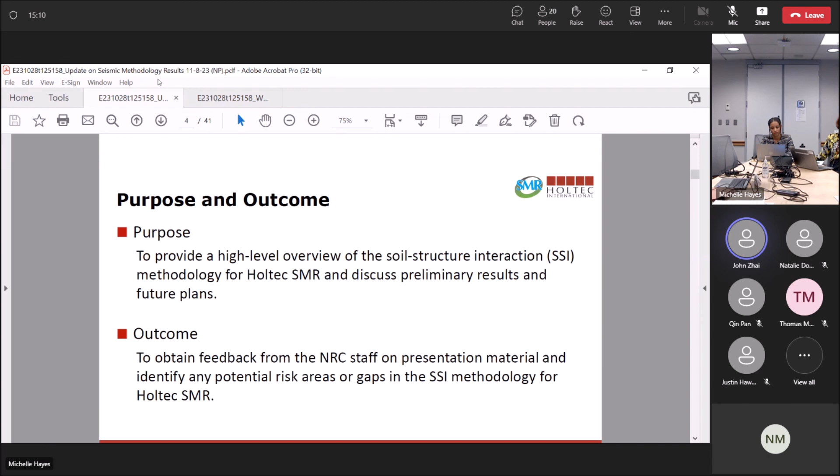By the way, we did receive comments from NRC staff this Monday, and we have done some review of the comments. We will provide our answers officially later on. Next, please.

So the methodology has been discussed with NRC, starting with the previous meeting about one year ago. We introduced a method which is not conventional - a nonlinear soil model involved in the SSI modeling and analysis, and this is also a time domain approach as opposed to the conventional frequency domain calculations. Following that meeting, we received NRC's feedback, and our understanding is NRC staff has a high-level understanding of our proposed method, and at that point we don't see any immediate concerns from the staff.

We also noted that NRC points out this is a first-of-a-kind review because of the nonlinear and time domain approach. NRC will have additional questions regarding this approach.

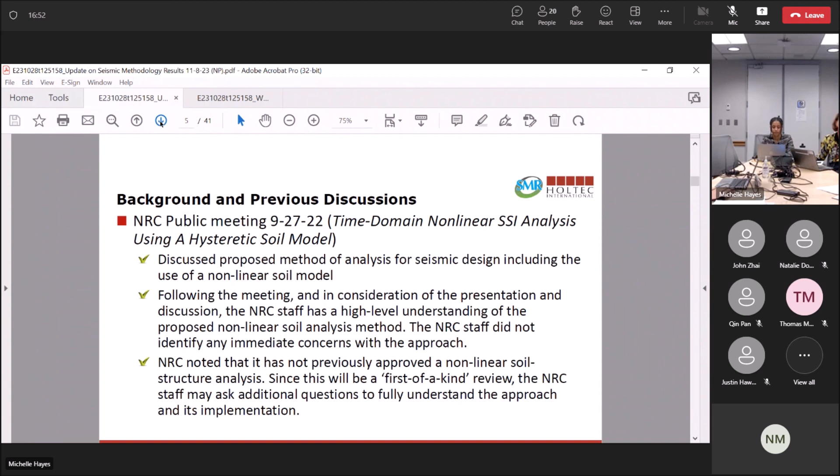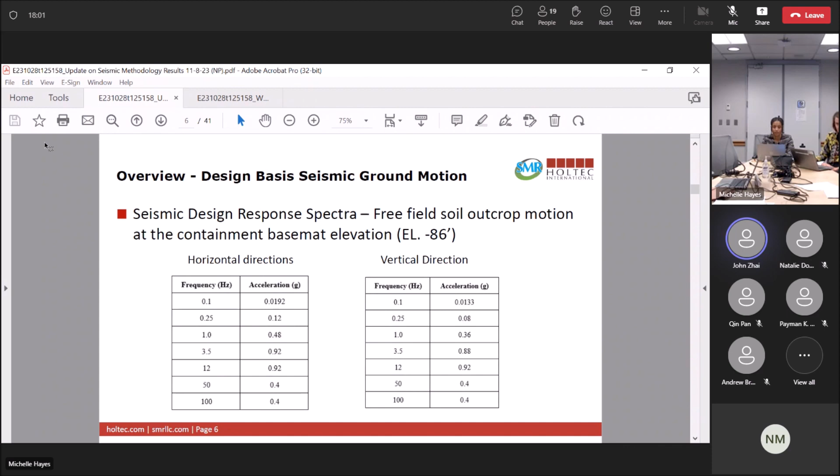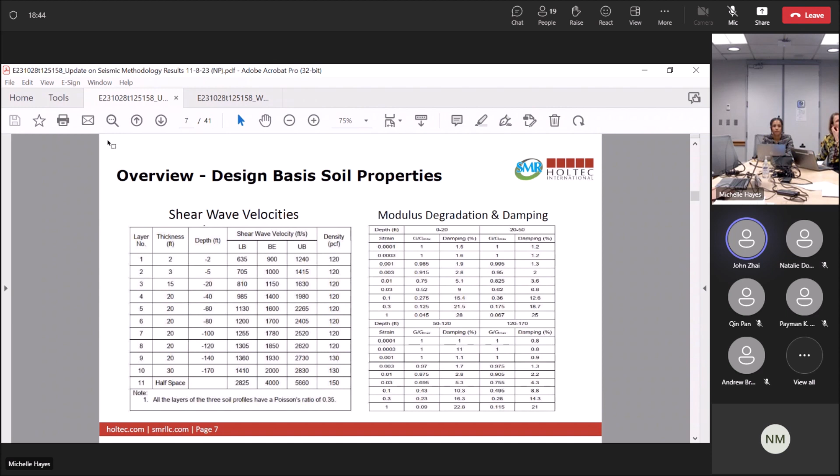This slide shows the soil profiles and some soil properties we chose. The soil profile follows the direction from SRP 3.7.1. We have best estimate, lower bound, and upper bound soil profiles to account for uncertainties in the soil properties. Overall it's a total of 170 feet of soil profile, and at different depths we expect the soil properties to change. So we use the 93 EPRI document to account for those variations with depth — basically the modulus degradation and damping ratio variations with soil depth.

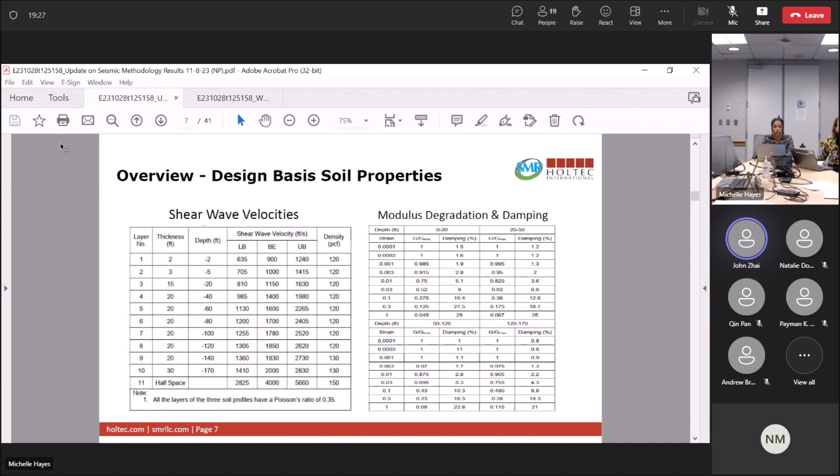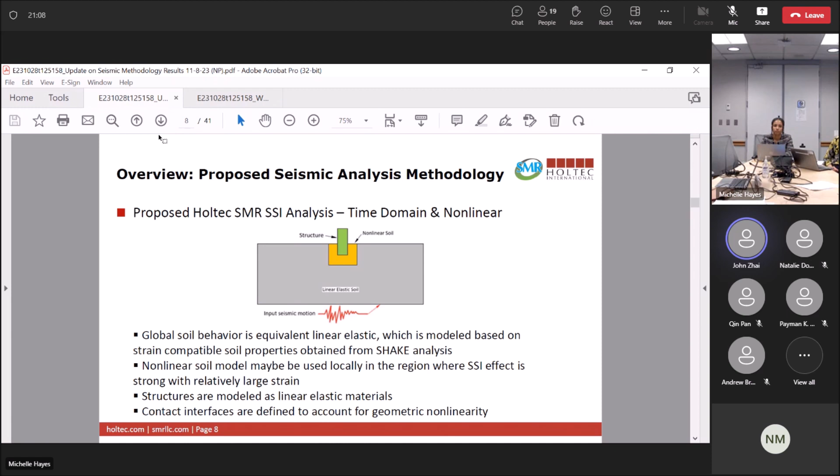So to instill confidence in this proposed method, we are going to do some validation work, which includes first the soil material models.

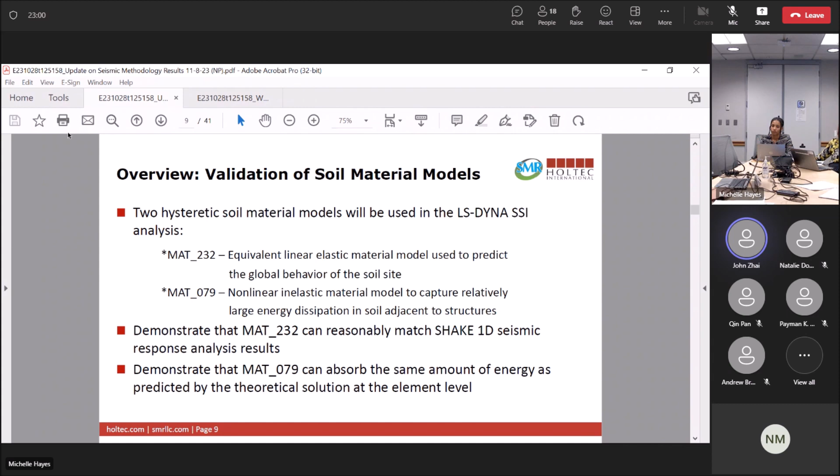Next slide, please. So the second validation focuses on the time domain analysis results. We want to use this validation to demonstrate that the results align with a conventional approach solution.

This is a demonstration that the SSI solutions are defendable using material 232 for soil. After that, we will introduce nonlinearity by defining contact between the embedded structure and the soil, so that the structure and soil can separate and move relative to each other. That will be demonstrated by running a higher seismic intensity to show that the difference between the DYNA solution and the SASSI solution becomes more significant as seismic intensity increases.

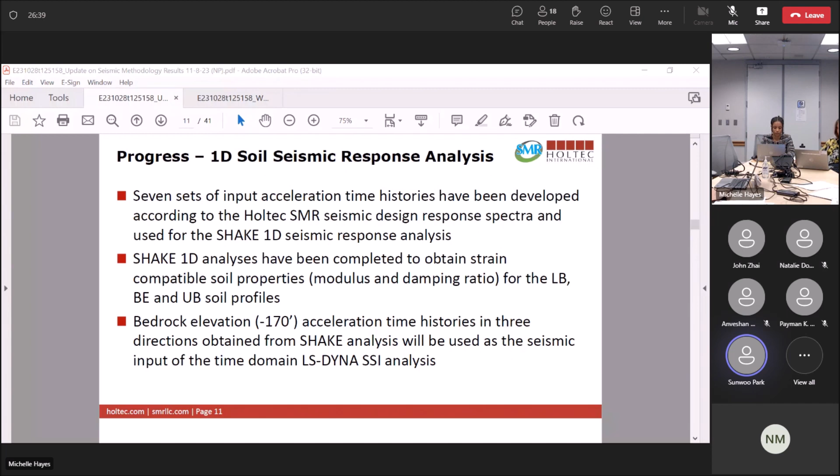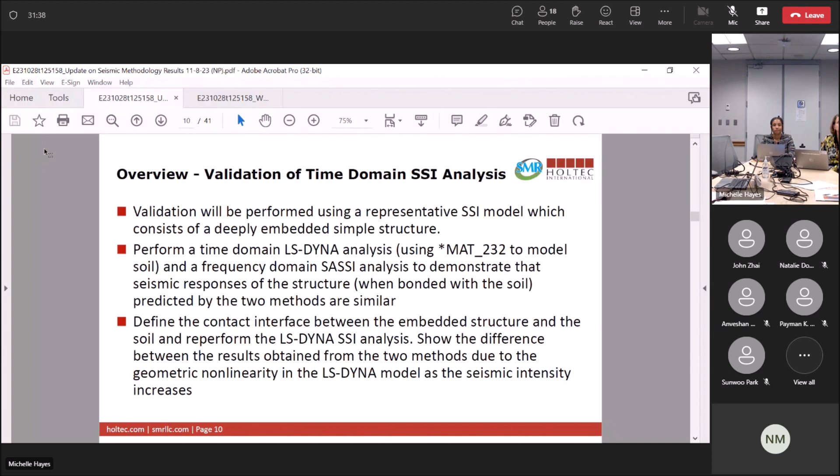All right, yeah, thank you. Okay, let's move to the next slide. I think on the previous one, we didn't finish that.

We generated seven sets of acceleration time histories based on the response spectrum, which is consistent with SRP 3.7.1 requirements for nonlinear analysis.

We also ran 1D seismic response analysis using Shake, so we get the strain compatible properties for the soil for all three soil profiles. We also obtain the input motion for SSI analysis, which is at the bottom of the soil column. Those are going to be used in the SSI model as input motion.

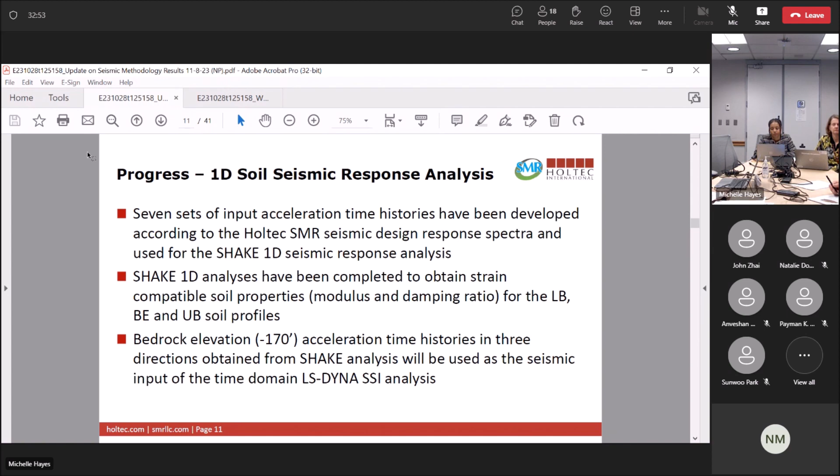Next slide. We have made some progress on modeling of the design. At the time we started this work, we only had a preliminary SMR-160 design. It's a single unit SMR. So the model we developed based on that preliminary design includes soil, seismic structures, and adjacent non-seismic structures.

Those are the containment enclosure structure, including the containment structure and the internal structure of the containment, the reactor auxiliary building, control building, radioactive waste building, turbine building, and annex building.

We use solid elements to model soil and thick civil structure components. We also use solid elements to model water in the annular reservoir and in the spent fuel pool. That water model is a simple water model and has no shear capacity. We use shell and thick shell elements to model structural walls and slabs, and thin shell elements to model equipment and some structures. Beam elements are used to model structural beams and columns, also steel structures and certain equipment. Finally, we use mass elements to account for the masses of equipment of significant weight.

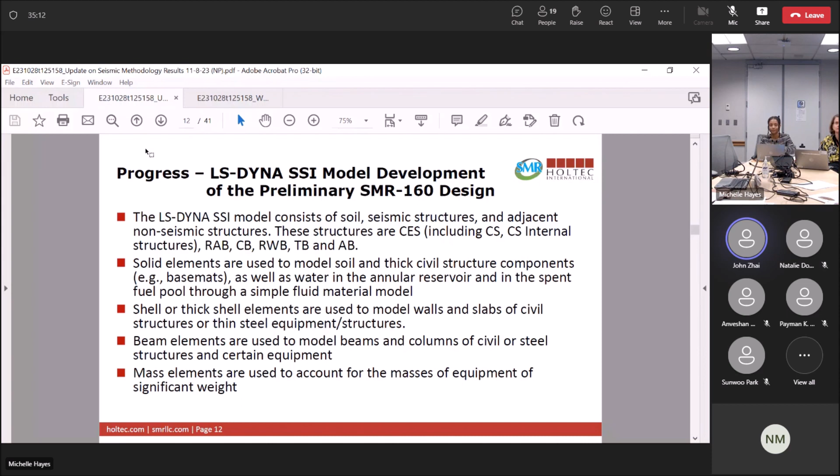Next slide, please. Before we move to the next slide, we have a question. Hi, John, this is Amit Ghosh from the Structural Engineering branch. Can you elaborate on your second bullet, the solid elements used to model the soil and civil structural components as well as fluid water? What kind of elements have you used, and how do you model the water part? Can you elaborate a little bit more?

Okay, the solid elements for soil, we use 8-node solid elements, and the material model, as I mentioned, we plan to use material 232 and material 79, but they all take the solid element shape. For the civil structures, the majority of those thick structures will also use solid elements, and for the walls there will be shell elements. For the water considered in that SSI model, we use a simple fluid material model available in Dyna, but we don't intend to model the sloshing effects. We consider that a secondary effect for the SSI analysis, so that's the plan for utilizing solid elements in the model.

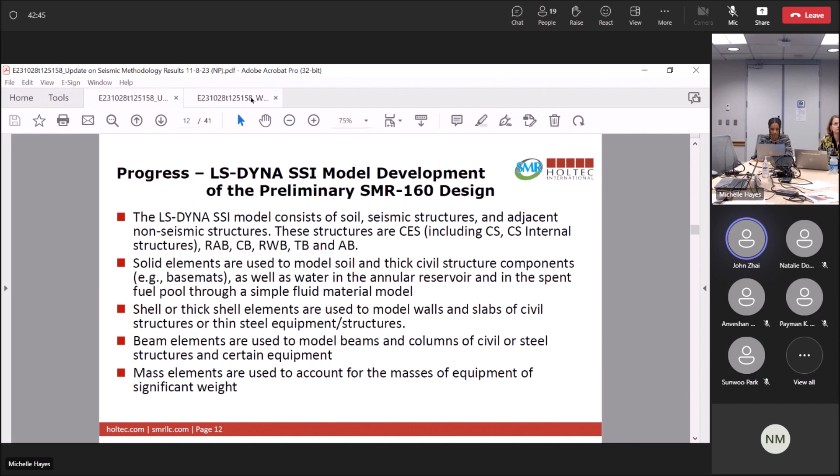Next slide please. This picture shows the overall model for the SSI analysis. So we have a big soil area region to model, and all the structures considered are in the center area of this model. And this soil goes all the way to the bedrock elevation, assumed at minus 170 feet.

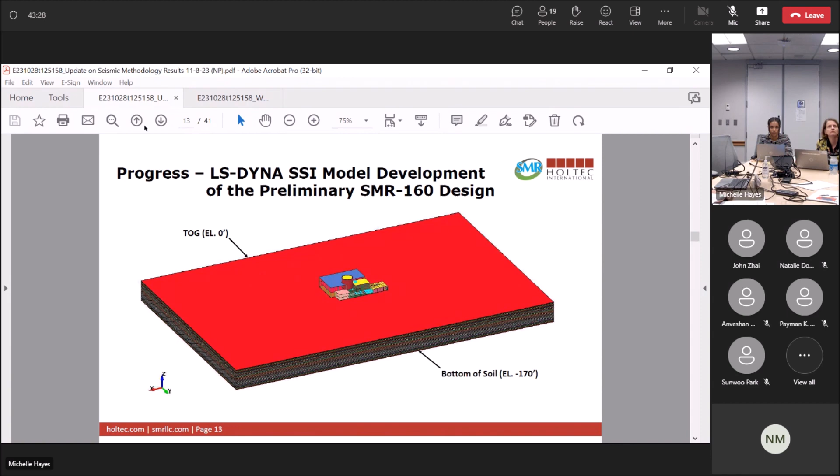Next slide, please. Next slide, I think it jumped too much, but okay. Hold on a second, having some trouble. We're on slide.

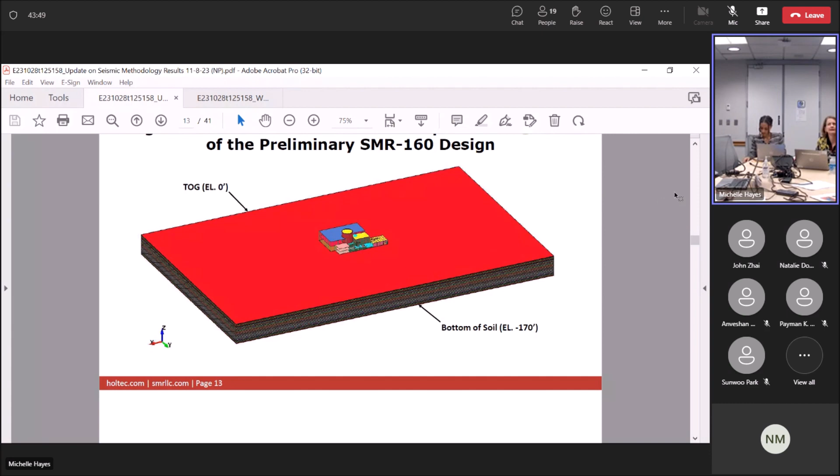This is a close-up view of that SSI model. We have turbine building, CES, annex building, RWB, and the reactor auxiliary building.

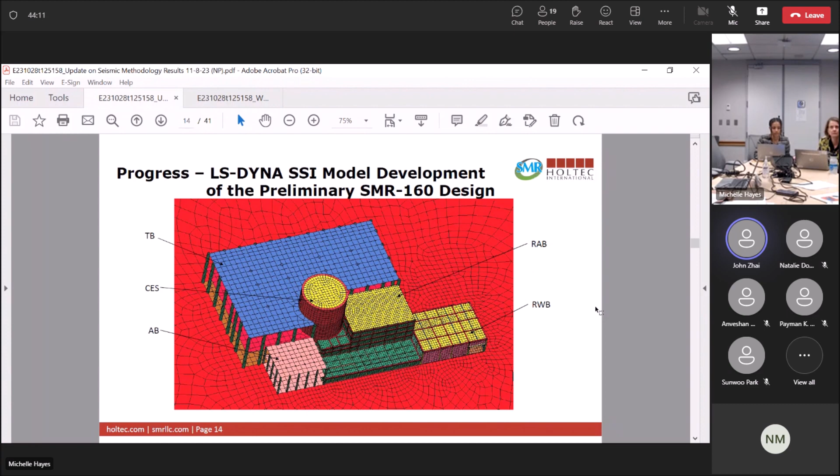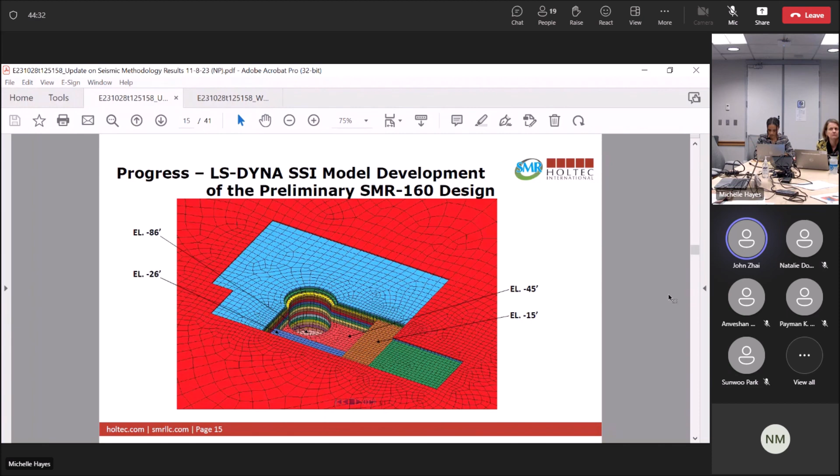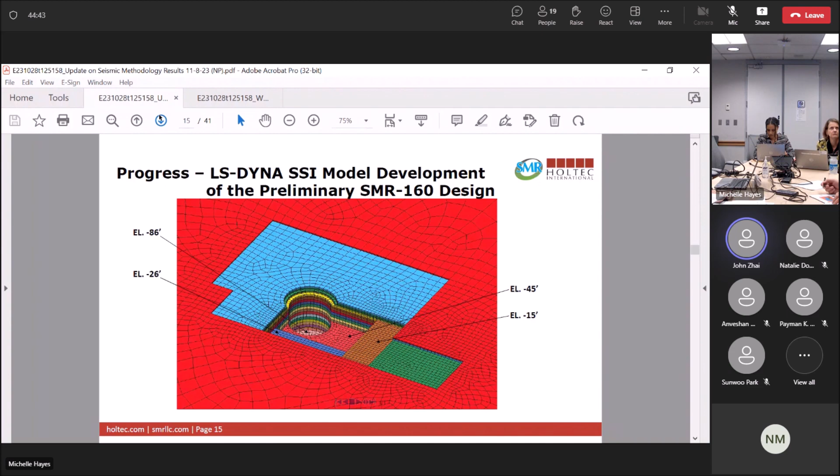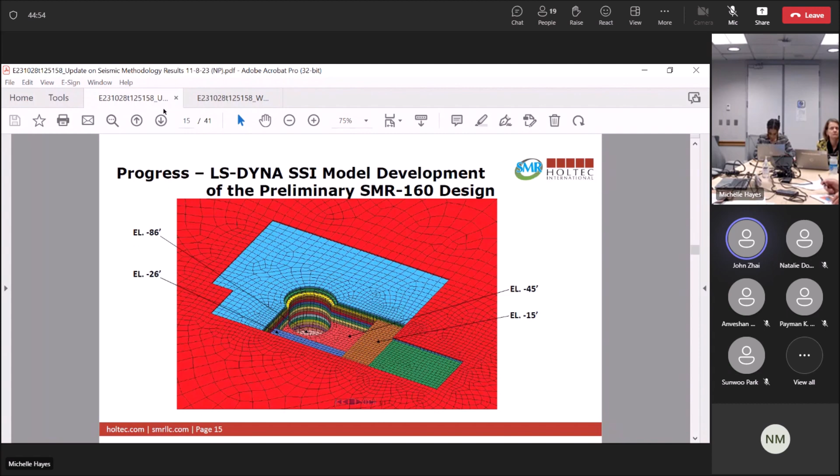Next slide, please. This shows various elevations where the soil surface interacts with the embedded structures. For example, -26, which is the base of the control building. -45 is at the bottom of the RAB, and there's another step in the RAB embedded structure at -15, and the CES goes all the way down to -86.

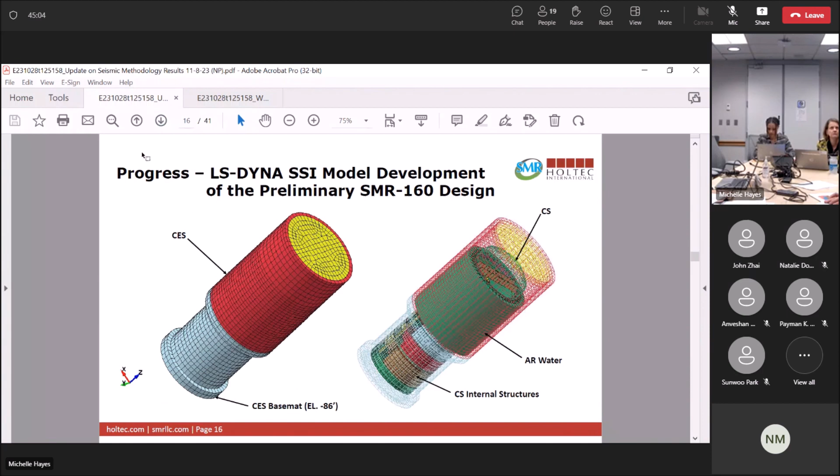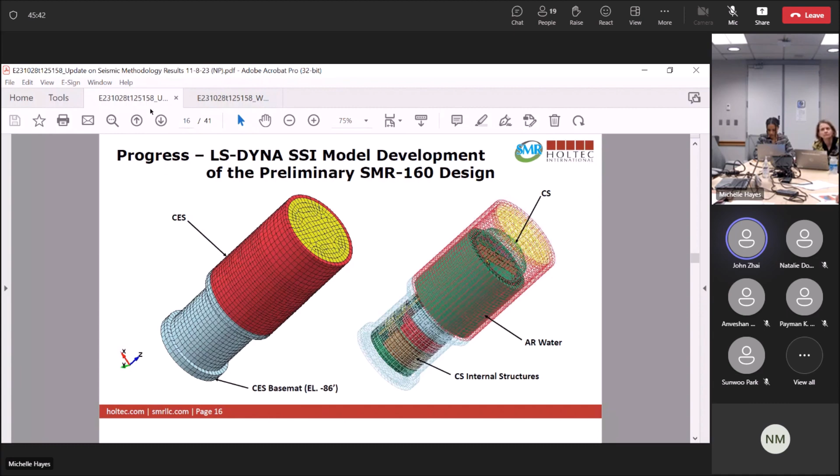Next slide, please. This picture shows the CES overall model. This gray area is embedded in soil, and you can also see the annular reservoir between the green and that kind of reddish mesh. That's a very narrow configuration, so no significant sloshing is expected, as I mentioned. And here you can see some of the internal CS structures.

Next slide, please. Okay, those are the clearer views of the CS and its internal structures. We have, for example, beams modeling the steam generator and RPV, represented by beams. The internal structure inside of that containment structure looks like this. Here is the spent fuel pool water in the pink area, and we have shell elements here to model the slabs. Next slide, please.

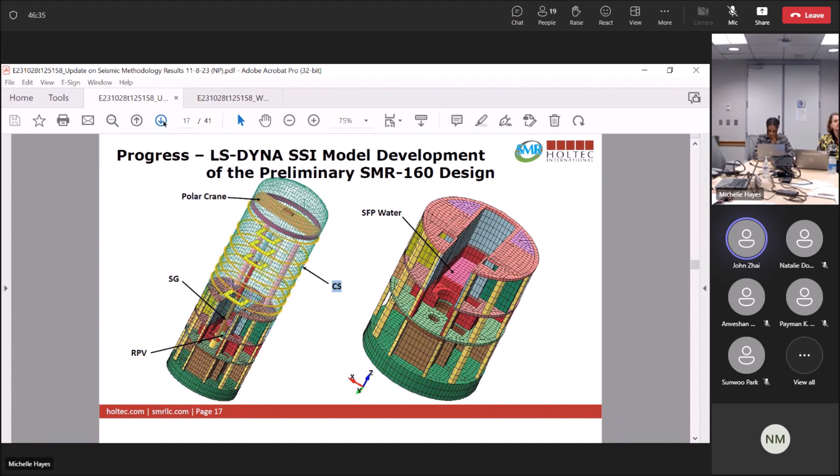This is one view of that reactor auxiliary building. Here, this typo should say CES, and this partially surrounds the CES structure and all those beam elements. You can see those beam elements, and other walls or slabs are all modeled by shell elements.

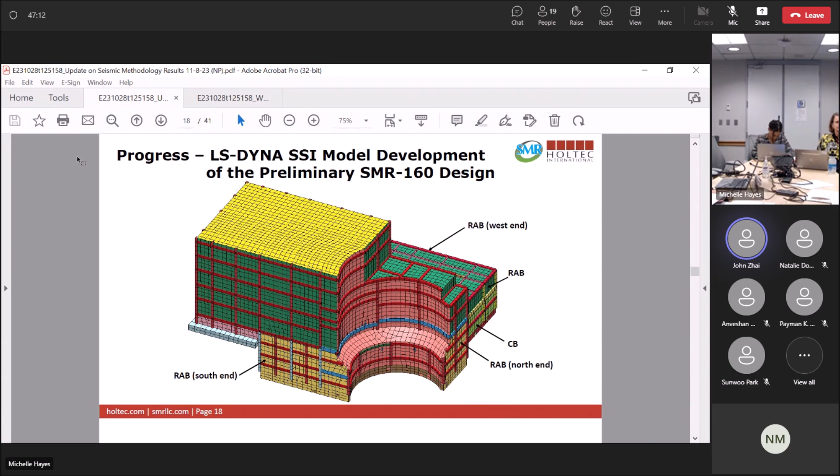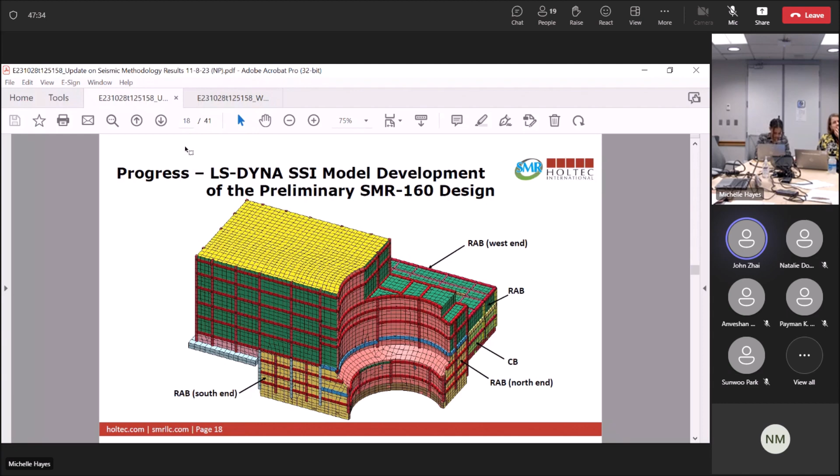Next slide, please. Are these buildings connected to each other right now, or is there a gap, like a seismic gap between the buildings? This basically shows the RAB and the CB, so they are connected by design. But the other large buildings are separated. As you noted, seismic gaps, isolation gaps, are provided between other large structures.

This picture shows another orientation looking at the RAB and the control building. So we have solid elements modeling that base mat at different elevations.

Next slide, please. I have a quick question here. Not knowing your configuration very well, all I see is this picture, and I see basement over basement. Is that just the way the picture is depicted, or is that true? Like the yellow basement at elevation minus 45 feet.

Over that, there is a CB base mat at elevation minus 26 feet, and over that, there is a RAB base mat at minus 15. Oh, this is just the way this view is.

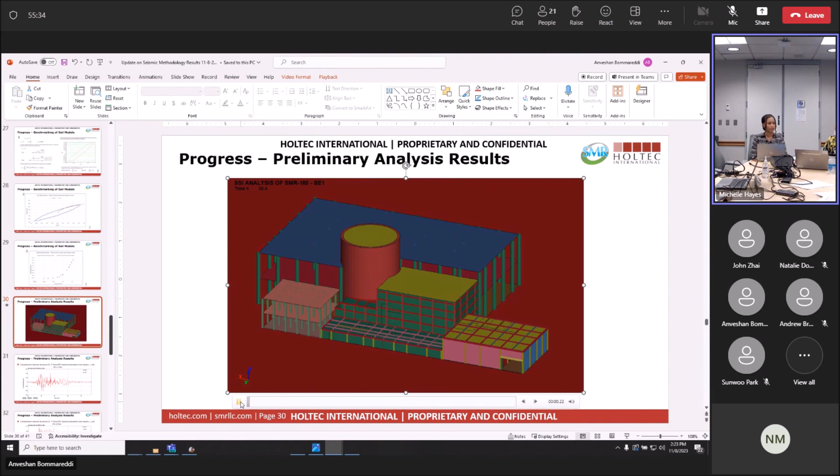Yeah, I guess I'll just comment, you have this marked as proprietary and confidential, but this is a public portion, and I believe that this was on our public slides.

So if you play that, you can notice the oscillation of those buildings. You see it? It's pretty subtle. We want it to be subtle, we don't want it to be drastic. Maybe you want to exaggerate the noise. We'll start again and look closer this time.

Yeah, you can see it if you just look at one little thing, in this direction, like this is correct.

Okay, so thank you, Anveshan.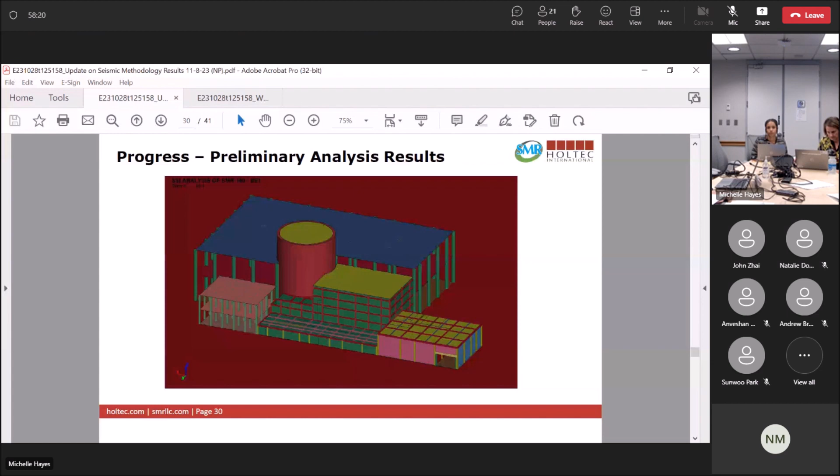So I just plot 2 locations showing what the acceleration looks like. This is an acceleration time history at the ground elevation inside the containment internal structure, at the RPV stand location, which I picked arbitrarily. This is X direction. The next slide will be the same location but in the perpendicular Y direction, just to make sure X and Y are horizontal directions.

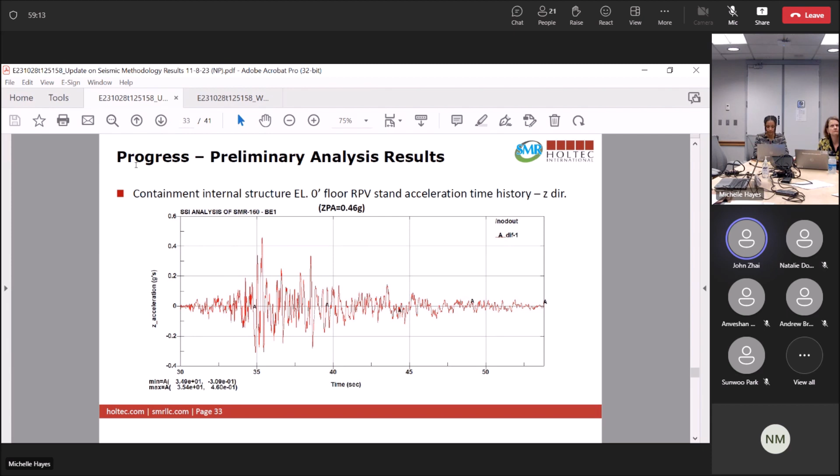So the next one will be the vertical direction time history. Next slide. You can see the ZPA increased a little bit, to like 0.46 Gs. Next slide, please.

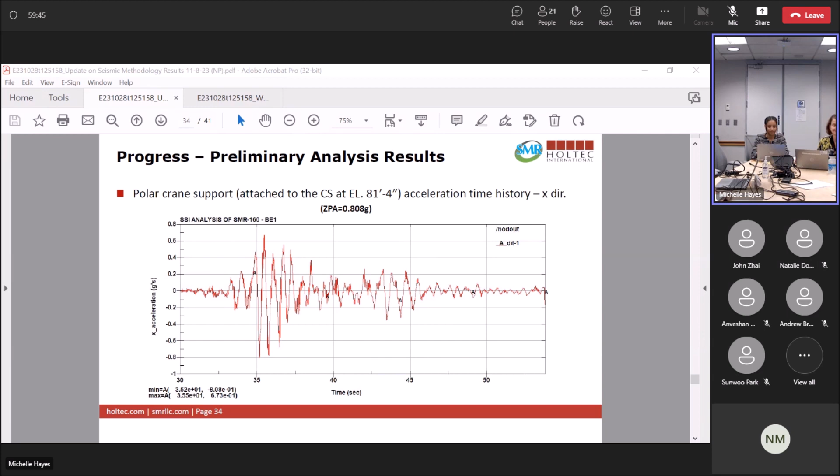Thank you. This result is taken at the polar crane supported elevation. You see the ZPA increased to 0.8 Gs roughly. That's the X direction, horizontal direction. Next slide, please.

The Y direction is about the same ZPA. Next one, please. That's the vertical acceleration time history. So they are all consistently increased, as this is located at a pretty high elevation.

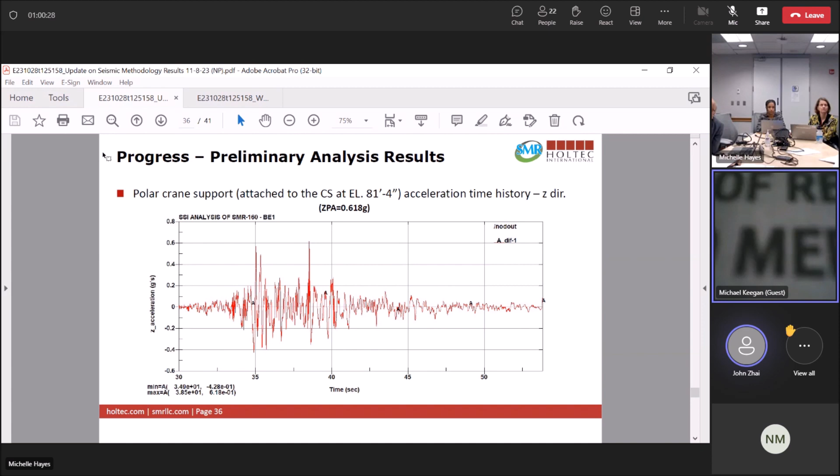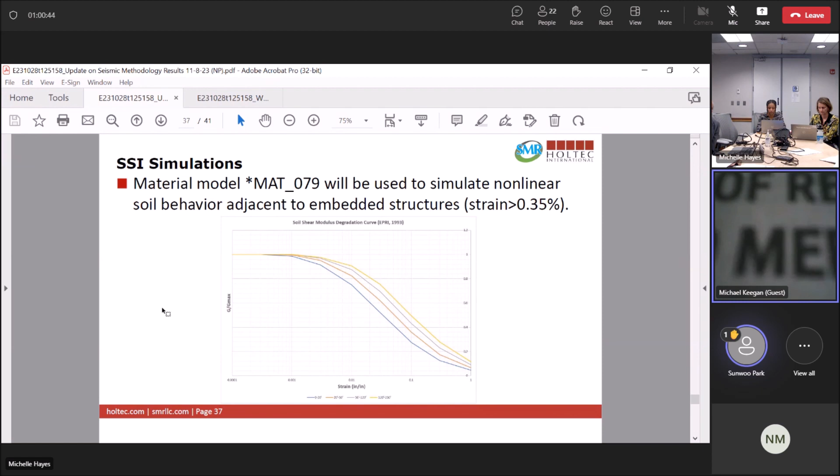Okay, next slide please. We have a question. Yes, this is Sunwoo Park again. You just show the response in terms of a time history. Do you have any response in terms of response spectrum?

Oh, I didn't create the response spectrum for that time history, I can do that, I just didn't spend time on it. Yeah, that will be much better, because the time history is difficult to interpret, whereas response spectrum provides much more information, such as frequency dependency and so on, so that should be much better. Yeah, you're correct, and I should have spent more time on this to show more insights into those responses.

Okay, thank you. So this one just shows our understanding of the limitation of the linear model.

Based on the literature studies, we believe any area where soil strain goes beyond 0.35%, it's better to use the nonlinear soil model. In Dyna, that's material 79. So that will capture the enhanced energy dissipation, maybe permanent soil deformation.

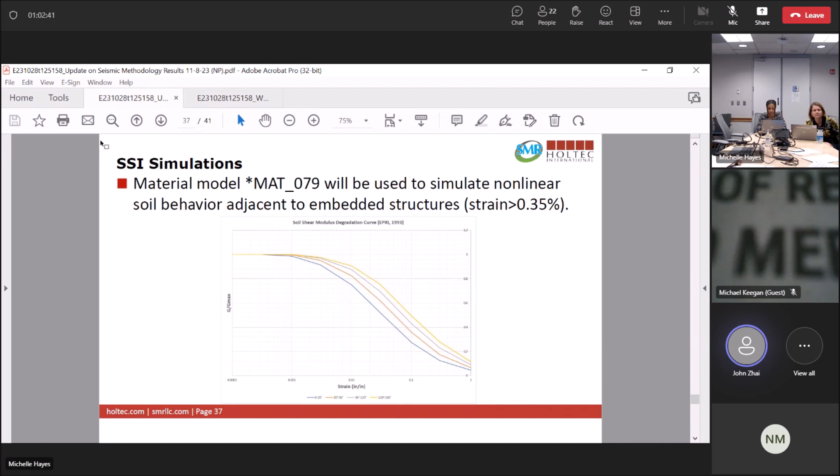And those are the SSI simulations we plan to carry out. So we have 3 different soil profiles, and we have 7 different earthquake sets.

We will start the run in 2 steps. First, we apply gravity only, so that all the initial responses can be settled for a significant simulation time for gravity load only. Then we have a full deck restart which captures the stress states of various members, and we provide the transient seismic load, the seismic input motions in acceleration time history in 3 directions. The analysis will generate results, and we will average those results consistent with SRP 3.7.1, and then develop an enveloping response spectrum for in-structure responses. This is per RegGuide 1.122 and SRP 3.7.2.

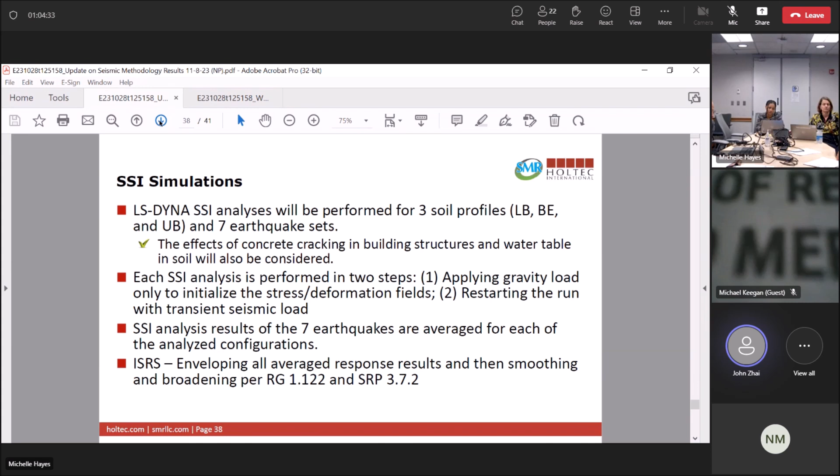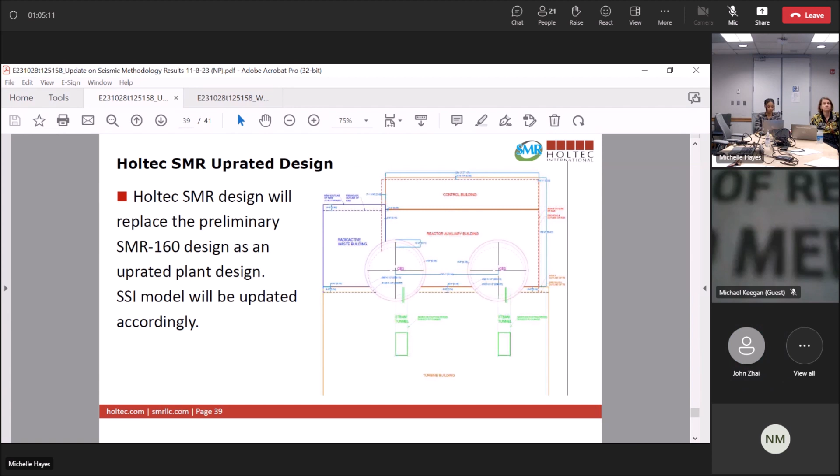Next slide please. Licensing approach: Holtec is considering submitting a licensing topical report that includes both the SSI methodology and results using generic inputs intended to bound a number of potential soil sites in the United States, including the Palisades site, which will most likely be the first application. Additional soil and rock generic input parameters are also being considered for inclusion in the licensing topical report. Finally, the licensing topical report is currently planned for mid-2025 and is intended to be referenced in a future CPA for SMRs at Palisades.